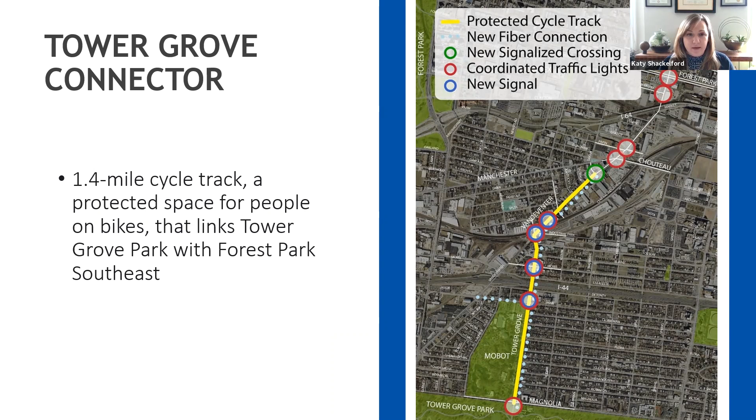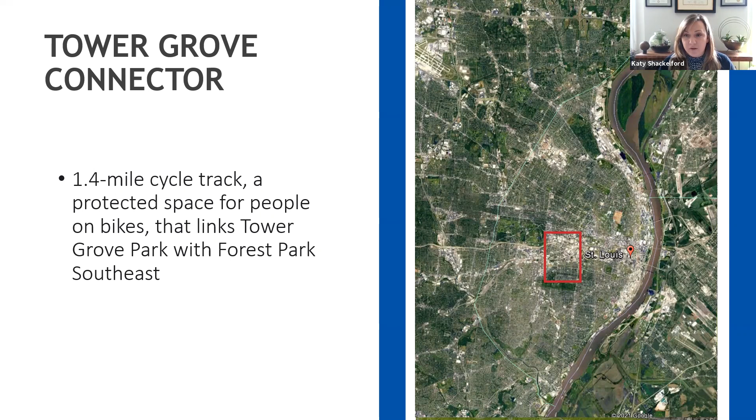For those who are coming from outside of St. Louis, here's just something to orient you. The corridor is in particular one of the hottest growing and most congested areas of the city. There's a number of major employers and highly populated neighborhoods in this area. And that's one of the reasons that this initiative became so important.

In addition, we just want to couch this to let you know that this phase that we're talking about really is the design engineering phase. The full project kicked off in December of 2020. Construction is intended to be complete by around spring or summer of 2024, given that there are no major complications. So the phases we're talking about today really end in the end of 2022, where things move from engineering and design into construction and implementation.

So with that, I'm going to hand it over to Taylor. He's going to talk to you about some foundation materials.

Great, thanks, Katy. So to start, we're going to start off on what is a cycle track. So cycle tracks are kind of an emerging best practice in terms of bicycle facility design in the United States, something that we hadn't really seen a whole lot of in the last decade, but are rapidly being deployed across the United States.

The thing that separates them from other bicycle facilities is the separation from other car traffic. And so, they really have some kind of element that protects them physically from people who are driving.

They're also more comfortable for people of all ages and abilities. So the main reason we're seeing them deployed more is to get folks that we otherwise wouldn't see on bikes comfortable in street spaces. Think children, folks with disabilities, people on recumbents, not your typical person who's comfortable riding in traffic. A lot of times we see these encouraging people to use the bike facility instead of the sidewalk. So a lot of the users we're aiming for are ones that wouldn't be riding if it was just an on-street, unprotected facility.

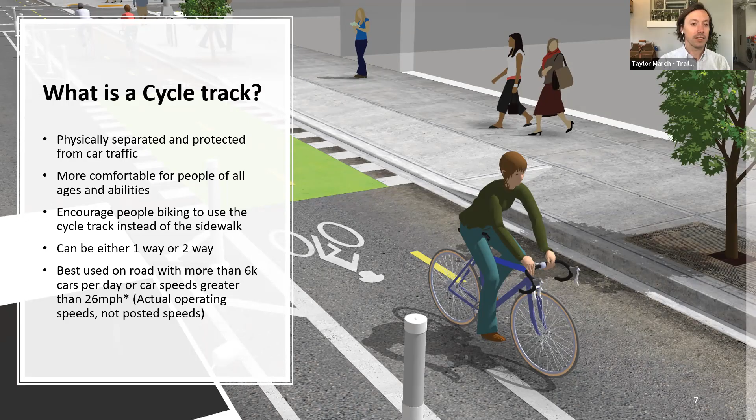They can be either one or two-way, and in this case we're talking about a two-way cycle track. They're best used on roads with more than 6,000 cars per day or car speeds greater than 26 miles per hour. That's actual operating speeds, not posted speeds. That's the current guidance, so we'll get into that a little bit as well.

This really centers on this interested-but-concerned group of people who are potential bike riders. A lot of the facilities we've seen deployed in St. Louis and other major cities have really focused on the somewhat confident or highly confident riders. What cycle tracks and other low stress facilities do is engage with folks we wouldn't otherwise see on the roads — children, again, folks with disabilities, people who are a lot more concerned about the safety they feel as they ride.

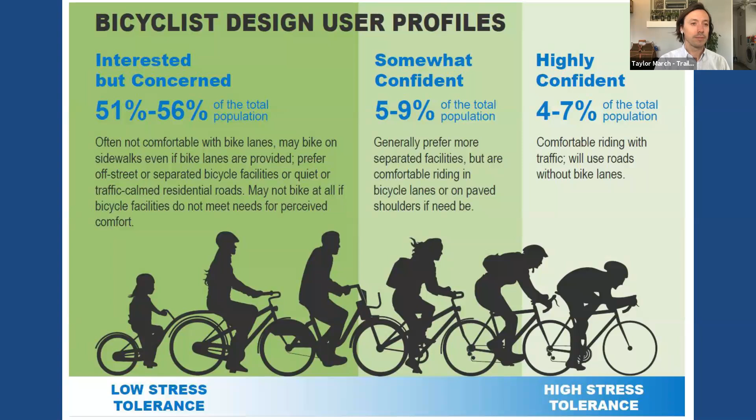We'll go to the next slide. So here are some local cycle track examples, or things that could be categorized as cycle tracks.

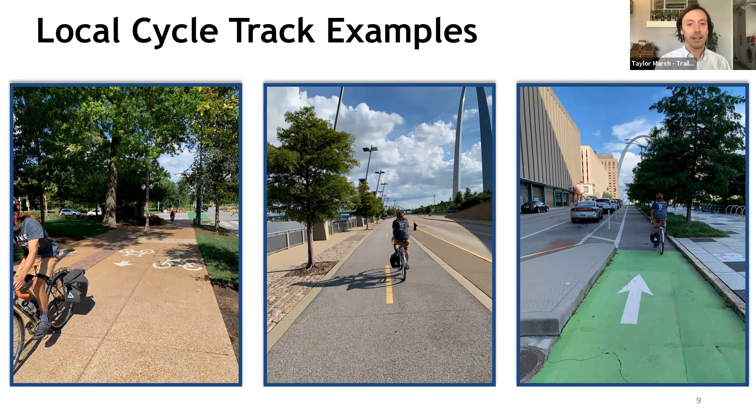On the left is Skinker and Forest Park Parkway, Skinker and Forsyth by Washington University's campus — there's a two-way cycle track with a sidewalk separated by a little cobblestone buffer. In the center is Lenore K. Sullivan by the Arch Grounds, again two-way. And on the right is Chestnut by Kiener Plaza downtown, which is a one-way facility.

So I want to highlight some of the emerging guidance for these. A lot of this is coming out of NACTO, which is the leading organization on bicycle facility design in the United States, taking best practices from Europe and figuring out what the application in the United States looks like. It's a group of cities that were unsatisfied with how things were rolling out, how quickly recommendations were coming down from the federal level, so they decided to make their own. This is their low stress bicycle facility guidance that came out a few years ago.

In red, we can see about where Tower Grove Avenue is. Tower Grove Avenue has a posted speed of 25 miles an hour and an ADT, or number of cars per day, of around 8,000. So from that we can really see that this falls into a protected facility in order to accommodate folks of all ages and abilities.

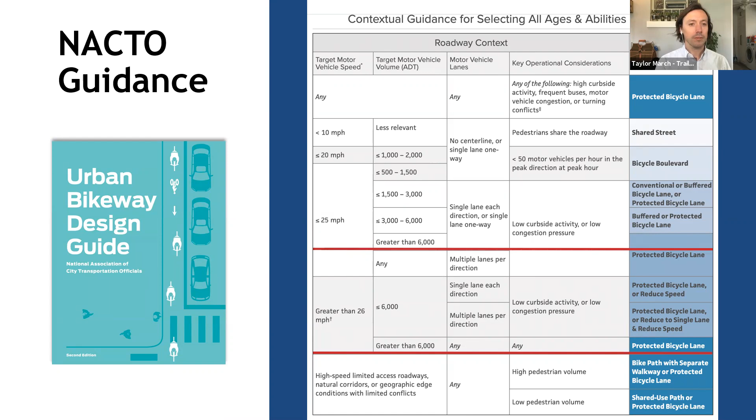If you want to go to the next slide — then the next is FHWA, the Federal Highway Administration. This is their chart, it's a little less clear cut. The NACTO chart has very straightforward, clear boundaries. The FHWA guidance has intentionally a bit fuzzy edges, but still within that 8,000 cars per day and operating speed of around 30. So we're bumping up from the speed limit, but we're for sure in that separated facility territory. That's important to note because a lot of DOTs and state agencies look to FHWA as the de facto guidance for facilities as they're implementing them.

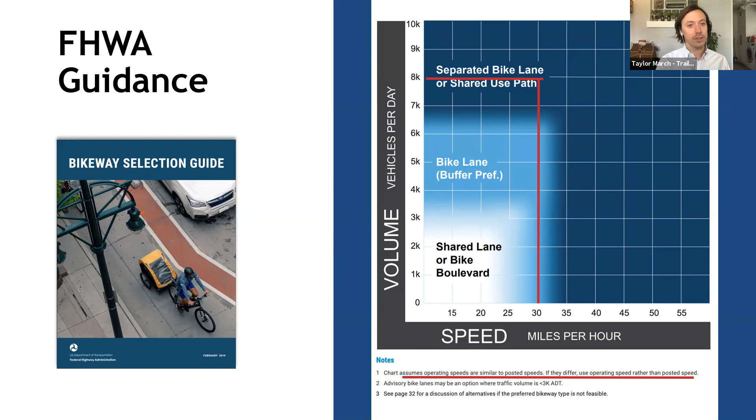So I want to switch gears a little bit to how we got here in the first place. Why are we talking about Tower Grove Avenue? Why this connection specifically? Tower Grove Avenue has a lot of historic use.

This is also known from a lot of the community advocacy around this corridor. In 2014, there was a group called Safe TGA that did a lot of community organizing. It was a group of residents really concerned about safety in terms of walkability and bikeability of this corridor prior to the Kings Highway Bridge closure. They advocated for getting the bike lanes and buffered bike lanes installed on Tower Grove Avenue prior to the bridge closure, so there was a separate space for people. That really set the stage for a lot of what we're talking about today.

Another thing that led into that was TrailNet's Connecting St. Louis process. In 2016, we began a planning process to look at a network of Bike St. Louis sidewalk upgrades that could galvanize and transition the city into a new place when it comes to active transportation. In that process, we had over 4,000 folks chime in with different kinds of input on the plan, did a lot of community engagement, and had over 60 civic organizations at the table helping plan for what that network could look like.

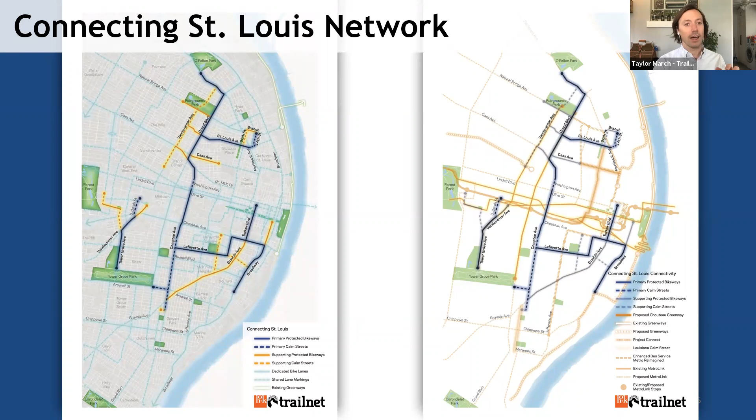This is the network that emerged. As we were planning, the blue lines are the primary network recommendations, and the orange ones are supporting recommendations. From the previous slide, you probably saw there are multiple corridor alignments that we explored. We were really focusing on street right-of-way and what could fit within the existing space curb to curb while still achieving that low stress connectivity. On the right is how that integrated with other plans being planned at the time, like the Brickline / Chouteau Greenway, the 20th Street cycle track, and others that the city is currently undertaking.

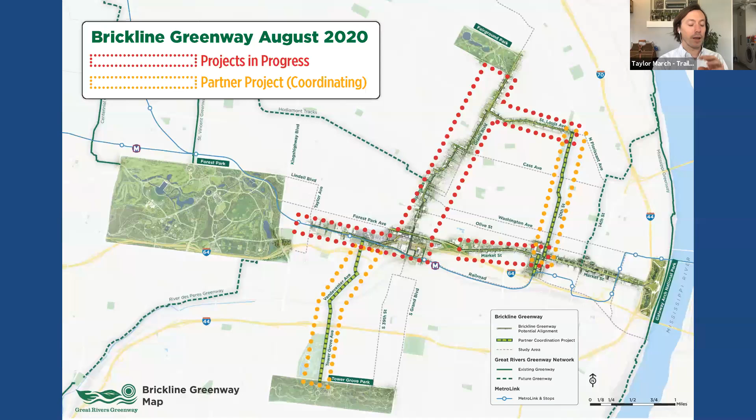This is, of course, the Brickline. The Brickline is a project that Great Rivers Greenway has been planning, originally called the Chouteau Greenway, originally looking at that Forest Park to the Arch Grounds and Washington University connection. Through their planning process, a lot of the community engagement heard similar things to what we did, the need to go north-south as well as east-west. In that, the Tower Grove project is shown as a key connection that connects people into the spine and ribs of the larger overall network.

With that, like Taylor said, the Tower Grove piece, we were all brought together by Arch to Park, now Greater St. Louis, and Cortex to look more in depth at that and how we could get that process going so it could anticipate or be ready to tie into the Brickline piece coming through somewhere in the Cortex district, which was a little undefined at the time, but we knew one of the goals was to get to the Cortex Metrolink station. One of the real opportunities with that station is the connectivity down to Tower Grove Park and to the Botanical Gardens, a pretty important missing link in a multimodal connection there.

We looked more closely, and as you saw in Taylor's Connecting St. Louis map, there were a few routes considered in this stretch. When we looked at that more in depth, through stakeholder conversations and by looking at some of the constraints on these different corridors, we evaluated Tower Grove going all the way north to Forest Park Avenue, a route that took us Tower Grove to Vandeventer to Sarah, and then a route that took us all the way down Vandeventer, basically all the way to Forest Park Avenue. In looking at these, we were trying to understand where the opportunities and challenges were, and what was going to make the most sense.

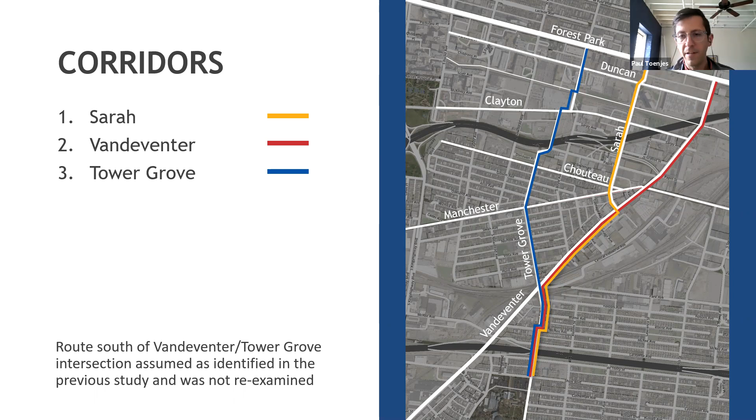Frankly, Tower Grove Avenue south of Vandeventer is relatively simple. There's a lot of right-of-way, and you'll see that in some of the things we'll talk about later here.

It's not a super challenging space to do this type of a cycle track facility. But when you start getting into Tower Grove north of Vandeventer, it becomes really challenging. The grid is there, the street parking is needed for the adjacent residences. The street is pretty narrow. The buildings are already in place. There's not a lot of opportunity for change in that space. So it's a really limited right of way. So that was a primary concern.

And one of the other things that really happened even while we were working on the original work that we did at Cortex was originally, Tower Grove Avenue, the major movement was up Tower Grove Avenue and then continuing on Boyle through the now Cortex district before it was Cortex. Well, then the roundabout was put in place at I-64, and a lot of the things changed in that area in a relatively short period of time, and that changed a lot of the movements too. So we were trying to be responsive to that as well as we were looking at this.

So this is a really confusing graphic, and we were even struggling with kind of the logic behind it a little bit earlier when we were practicing for the presentation today. So I won't take you through the weeds here, but ultimately what we decided was that Tower Grove to Vandeventer to Sarah, continuing up through the Cortex district, made the most sense as the overall routing, particularly the stretch along Vandeventer because of the opportunities there for partnering with redevelopment as the southeast side of Vandeventer starts to redevelop. Some of those industrial properties start to change over, but there's opportunities there. It's also a relatively wide street and right of way.

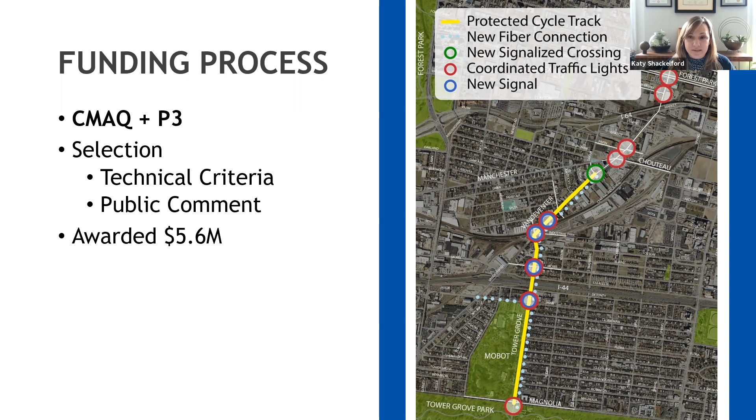So it was really that that put the project over the top and helped it really zip through this approval process. The other thing I want to talk about is public-private partnerships and how they play a role in this. So for those who are unfamiliar, a public-private partnership is a collaboration between government agencies, private sector companies, and not-for-profits. So these are all of the different agencies playing a role in some way, shape, or form in the project of the Tower Grove Connector.

There's a number of benefits to public-private partnerships. In this case, really the biggest thing is that we were able to get a faster solution than if we had just waited for traditional funding to become available. It also afforded us the opportunity to stretch a little bit in some of the features that maybe the city on its own wouldn't have been able to afford or invest in.

But it's really important if you're ever working with a public-private partnership, there's a couple big takeaways. Most importantly, in the end, one of these agencies becomes the official owner of the project. In this case, it's the city of St. Louis. So throughout the planning and design phases, we may have had some really big picture ideas and some innovative approaches, but it's most important to know, can the city of St. Louis operate and maintain this facility once it's handed off?

And so that's something we keep in mind throughout all the phases of this project: are these the lighting features that the city has in their storehouse? Are these widths of things that the city can maintain? Are these plants that we're including that the city has the ability to provide maintenance on? And so that is one of the things to keep in mind in a public-private partnership: figure out who the owner is and make sure that you're working with the owner so that once it's implemented, everything can be maintained and supported for the long term.

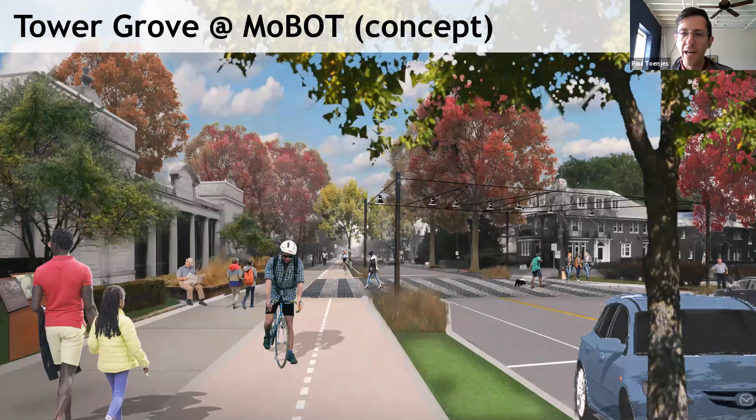So you see the idea of the facility. We're not sure yet if we're going to be exactly at sidewalk elevation or maybe at street elevation. This rendering shows it at sidewalk elevation, but one of the things that we're really trying to be cognizant of is making sure that there's a clear distinction between the bike facility and the pedestrian sidewalk space, so that there's a clear difference in pavement material or a transition in elevation.

One of the examples that Taylor showed is the Forsyth cycle track over by WashU. And one of the biggest comments that we've heard for years on that particular facility is, there's the cobble band, but it looks the same whether you're on the cycle track or you're on the sidewalk. So there's a lot of mixing and willy-nilly free-for-all in that space, particularly when classes are letting out.

And one of the things you see around WashU's campus is that on later projects, like along Big Bend, there's a clear difference between the pavement materials and the way the cycle track is treated versus the sidewalk space. So that's something we've learned over the years. And we want to make sure that that's built into this project as well.

And one other thing I'll just hit on this, you see the Flora Gate, trying to really reestablish this historic connection between the Flora Gate and Flora Avenue as it was originally laid out by Henry Shaw.

But this stretch being in the historic district, there's a lot of challenges just in working in those confines and understanding. And we've been working very hand in hand with the State Historic Preservation Officer to make sure that whatever we're proposing fits within the context and within the way that the historic designation is spelled out for the neighborhood.

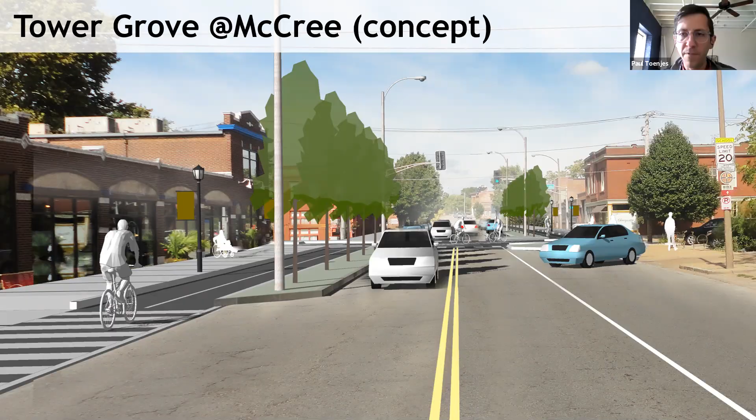And then it also has a fifth leg, which is Central Industrial. And we try to avoid having 5-legged or more intersections whenever possible. So all of these things make it a really, really horrible space to ride a bike across, to be a pedestrian in. And there's also a good number of vehicular crashes in this space as well.

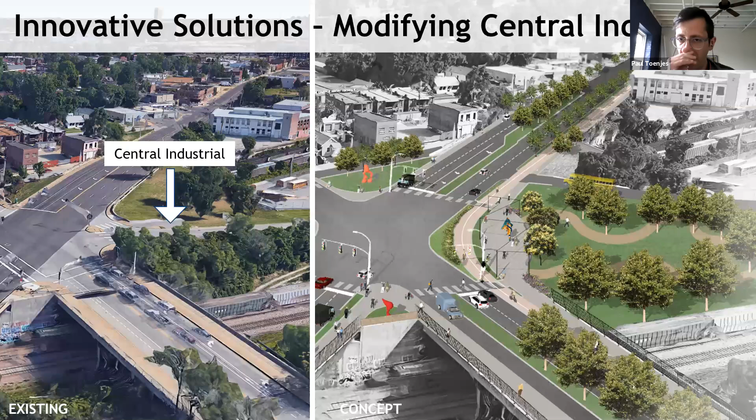So if you go to the next one, Katy. So the last one to show is Vandeventer, and it seems huge. It seems like a giant wide street. It has parking on both sides today, 4 lanes. I would say the average speed is 60. Just ballpark. I don't know. It feels like it. It's terrible. It's a horrible space. But it is also transitioning.

You know, like Rockwell, there's a lot of redevelopment happening on this east side of the street as shown in the image here. And then the northwest side of the street has a very different character. As you get into the Forest Park Southeast neighborhood, there's a very different kind of parcel size and everything else. But with Vandeventer, as that's turning over a little bit on that southeast side of the street, there's some opportunities to work with the right-of-way, work with some of these parcels as they redevelop. And if you go to the next one, Katy.

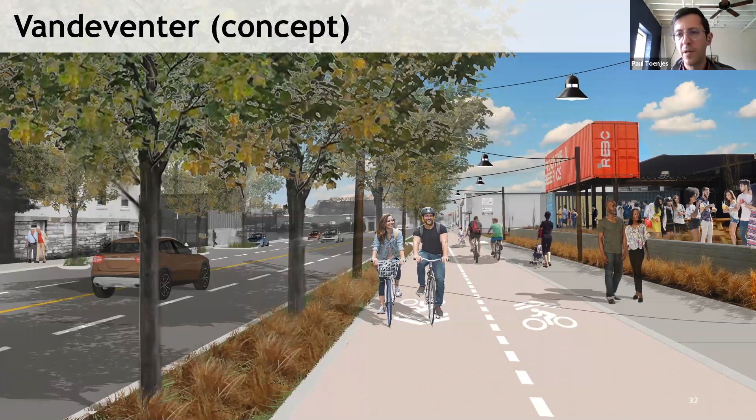So the big vision for Vandeventer is to try and create something that's still comfortable in a street that has to have a lot of throughput. And that's the thing with the CMAQ is, you know, we've still got to maintain the 4 lanes. We're trying to maintain parking in the space as much as possible, primarily on the northwest side of the street along the Forest Park Southeast side. But in creating a comfortable cycle track in this space, it's really about some kind of buffer, whether it's trees or we get into some kind of a physical barrier if we end up really constrained with space.

The idea is that it really feels separated from the, you know, I think it's actually marked 45 miles per hour on Vandeventer. Maybe it's 35 at this stretch. I can't remember. Do you guys remember? Katy, you're muted. Anyway, yeah, we'll have to look it up. Scott Ogilvie says 35, and you know, average speeds are well above that, as I mentioned.

So the thing with this is really creating that comfortable space, but then also looking at ways that we can tie into this new neighborhood identity that's evolving, where lighting and different materials and things start coming into the space as well. One of the challenges, and if you want to go to the lessons learned, Katy, one of the challenges in working with Vandeventer and with our CMAQ funding is we're really constrained from a funding standpoint to working on just the side of the street that we're doing the cycle track on. So we're constrained by the project to not affect the curb line on the other side of the street.

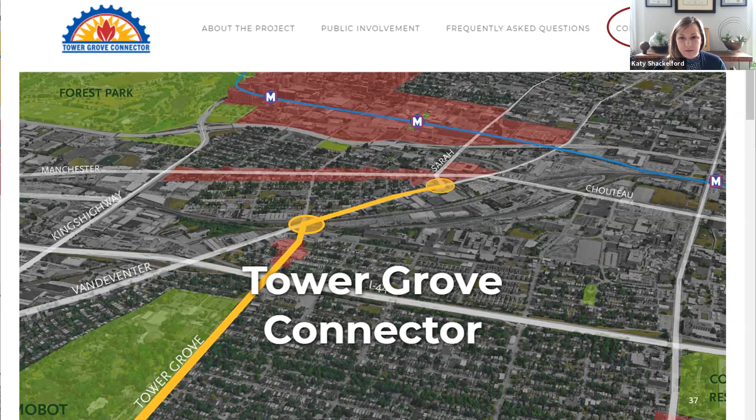If you have a specific question, you can fill out that field, and there's a box below where you can ask your question. If you just want to learn more about the project and stay in the loop, I recommend you submit your email for the project updates.

Before we finish today, we just want to talk about measures of success. How do we know that the Tower Grove Connector project was a success? Well, really, we're going to bring it back to our project funding.

Project funding's biggest measure of success is going to be air quality improvement. So that's definitely going to be something we're taking a look at the end of this project once it's installed and up and running. We also are expecting and anticipating reduced crash rates along this corridor and fewer conflicts between riders and automobiles.

We want, like Taylor mentioned, to increase the variety and kind of type of cyclists and walkers, but also physically just see more cyclists and walkers using this space. And before we drop, I'm going to let Taylor tell you a little bit more about how we'll be documenting that.

Of course, as mentioned, this is really leading people to the Cortex Innovation District where there is a Metrolink station. So we anticipate that increased multimodal ridership will happen as a result of this, people riding their bicycle or walking to the station instead of using their automobile.

Really one of the major things we're hoping to see, particularly along Vandeventer, is a positive economic impact and a revitalization of that corridor, because this is going to be activity, this is going to be action on the street, and that aligned with all the other things and changes taking place is going to create a really great opportunity for businesses to thrive.